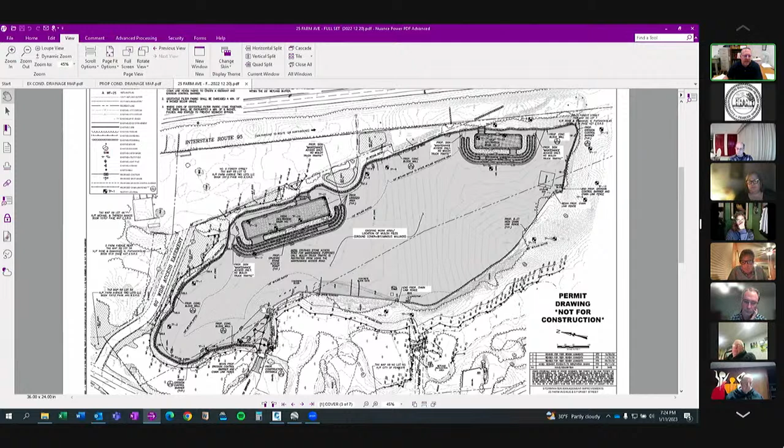What the test pit information also revealed was that in the northern lobe of the property, there was historic fill, and the city and GZA agreed that this area was not an ideal candidate for infiltration. As such, we initially attempted to send stormwater from this area. If you remember in the existing conditions drainage map, we have this large area here, which is about 105,000 square feet. We attempted to send this to infiltration basin 1 and treat the stormwater here.

What became evident during that process was that it was not practical to treat for or attenuate the peak rates of runoff coming to this design point. We were sending too much water to this design point and didn't have a practical solution for that. So we pivoted back to the design you see before you today, which is to retrofit an existing development with BMPs to treat for water quality and provide groundwater recharge.

Through the peer review process, and my thanks to Janet Bernardo for her review comments, in addition to the stormwater BMPs I just described, the project also includes vegetative screening, which I believe is shown in our proposed drainage map, in this area here. It also includes a 6-foot high chain link fence that will be outfitted with geotextile filter fabric. That fence begins here and wraps around the property and ends over here, extending this entire length.

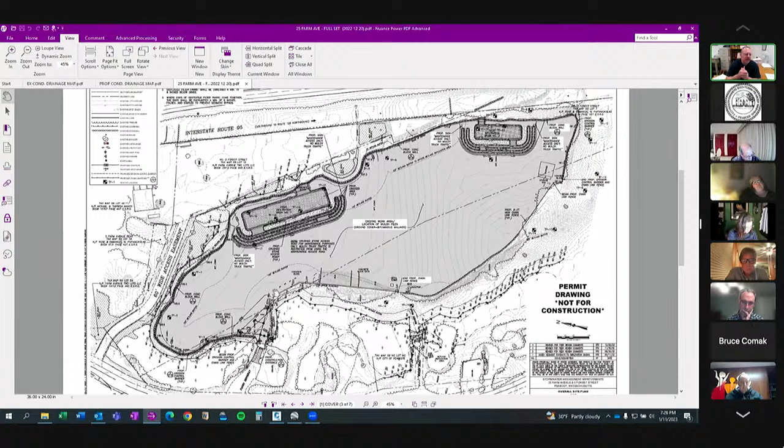Additionally, we understand that the peer reviewers suggested some supplemental spot grade information. The concern is that there's not enough information in this area to adequately describe the intent of the design, which is for upgradient contributing areas to drain to the sediment forebay prior to getting into the infiltration basin. So we will definitely update this area to include additional spot grade information to better define that design intent.

We'll also update our O&M plan to include all the revisions suggested by the peer reviewer.

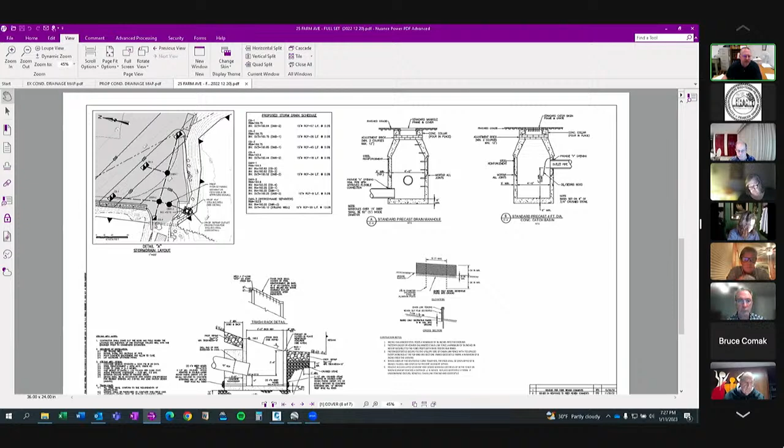As Kim had touched on, we understand that there's some concern with the closed portion of the drainage system. This is a zoomed in look at that. We have a series of catch basins connected to a hydrodynamic separator, which will then go to a stilling well. This is a detail of the stilling well here, for energy dissipation.

JD Raymond is committed to inspecting these catch basins and the hydrodynamic separator weekly instead of monthly, as is currently described in our O&M plan, and they'll immediately schedule cleanings when warranted.

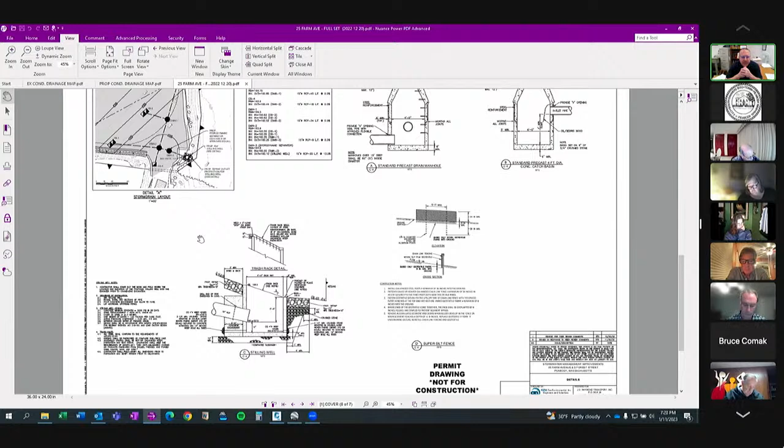At this time, I'll turn it over to Dan Nitschke to discuss more of the planting plan.

Thank you. Dan, you're on mute.

My apologies. Thank you, Steve, and thanks for keeping this design up. The screening, as you see on the map, says 4 to 6 foot arborvitae. We thought about that a little bit more from the perspective of potential wood mulch migrating through the air, and we think we've got a better planting idea.

What we'd like to propose instead of arborvitae is Colorado blue spruce. Colorado blue spruce has a maximum height of 75 feet, ranging from 50 to 75 feet. That puts us in the 60-foot range folks were looking for, if the piles were allowed to be that high, giving something similar in height. Spruce trees grow fairly dense. We plan to place them on a 15-foot on center arrangement. Their identified width is typically in the 10 to 15-foot range.

So if we place them every 15 feet, we expect that the edges of the branches will interlock as they become mature, creating more of a full barrier for the wood mulch to keep that onto the property.

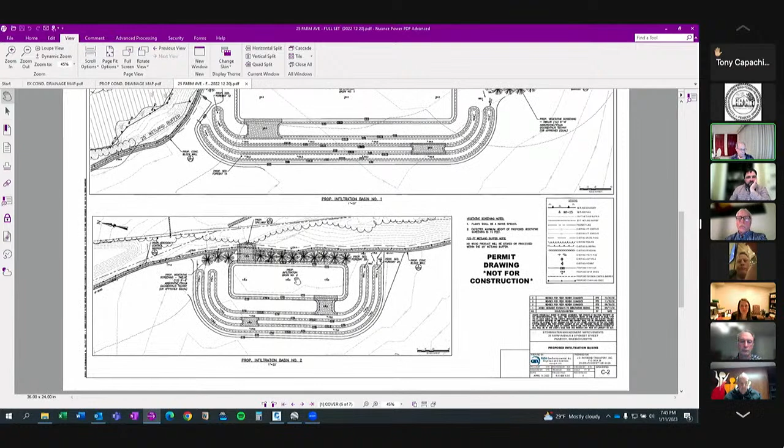Okay, my second question, so in conclusion, my questions would be with regard to the closed drainage system at the driveway. The concern is that if the system gets clogged, the resource area would receive runoff, and there's no way of rectifying that.

So am I correct in saying that the weekly inspection of the drainage system is going to mitigate that problem? In other words, the system is designed size-wise to handle any storm water, it's just that if it got clogged there'd be a problem. Is that correct? Yes, the weekly inspection will greatly increase their ability to maintain the drainage function of that area. But the system is sized to handle it, subject to it not being restricted by flow, restricted by silt or other matter that might get into the catch basins.

That's an engineer question, Steve. So the catch basins are in place to provide some water quality treatment, as is the hydrodynamic separator. In storm events of greater intensity than the water quality storm, which is a 1-inch storm over the contributing impervious area, water is going to continue going where it goes presently, which is just overland into the resource area. So what we're proposing is to treat the water quality event, and the catch basins will contain any floating mulch, as will the hydrodynamic separator.

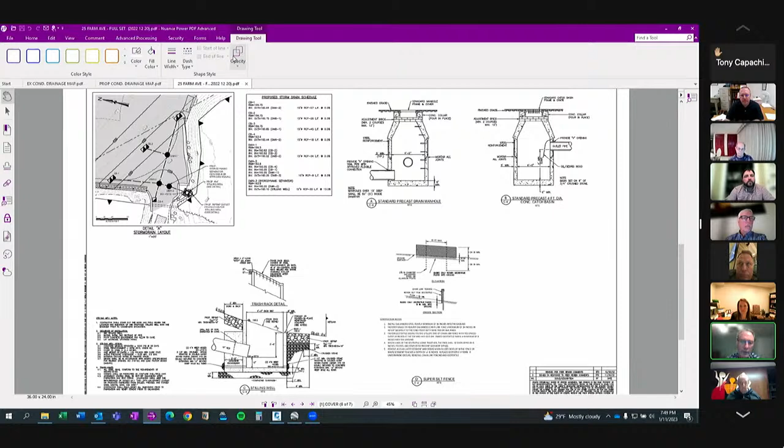And just if the engineer could quickly describe for me, to understand the functionality, it looks like the drainage system is all overland or sheet flow. If you could go back to the other sheet with the proposed conditions drainage. So those are all, it's all the drainage would hit those curved depression areas first, and then fill up, and then fill into the square basin later.

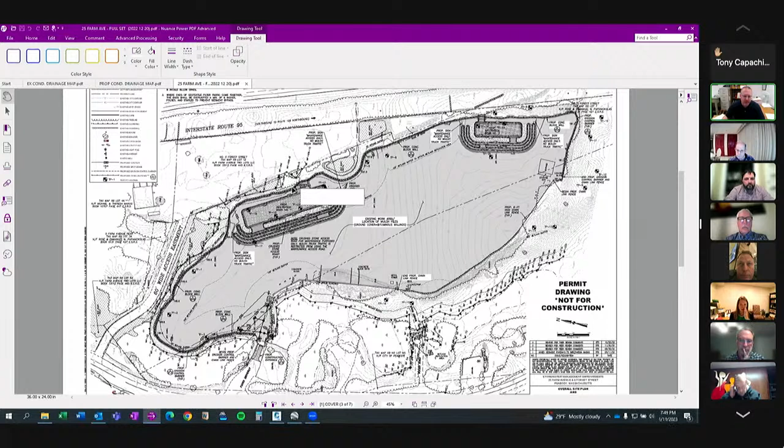Correct, it'll be collected by the first sediment forebay, overspill into the second sediment forebay, and then spill into the infiltration basin. This is sized to hold and infiltrate the water quality storm. And again, in larger storm events of greater intensity, it would just continue overland where it goes presently. So the water currently leaves the site here, and in this corner here.

But these treatment practices are being installed to treat for the water quality before it goes down gradient. So over time, we're attempting to improve the existing condition, and over time those basins will be dredged, per se. The maintenance and inspection of the basins and the sediment forebays include removing any accumulated materials within the basin or the sediment forebays. Yes. Okay, thank you. You're welcome.

Anybody else? Does this have to be open to the public at this point? Mike? Yes, through the chair, Stuart, I have some comments to make, but I'd like to hear from the public first. Okay, let's open it to the public.

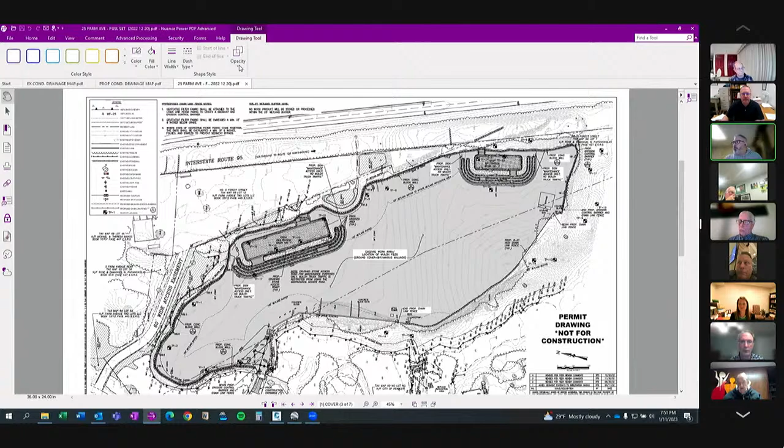But briefly, I have some concerns, and I think they're getting there. There's some new information that came out tonight that is promising, but we're just kind of hearing this information, as is the commission tonight. But I did just want to summarize some of the outstanding issues, and I'll be very brief as I go through.

So before the order of conditions issued, Horsley Witten had concerns with the closed drainage system. DEP had some technical comments that related to seasonal high groundwater and pre-treatment. And then we had issued a letter on December 21st to Bob Langley with some comments on the project as well.

So Horsley Witten said that they have some issues with the closed drainage system. We have some issues as well, in that, first of all, the Stormwater Handbook says that for each deep sump catch basin, only a quarter acre of impervious surface can be tributary to it. They have 3 deep sump catch basins with over 2 acres going to it, so you can't take the full 25% credit. And then the hydrodynamic separator that they're taking 75% credit for.

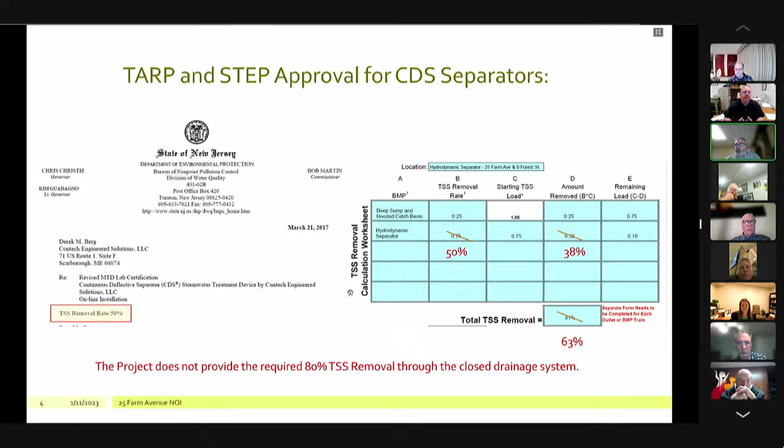If you go to the TARP and STEP approvals for the CDS separator, it's called out at 50%. If you run the 50% through, they're at 63% TSS removal for that treatment train. So again, they don't meet the standard in that area.

Soil testing in the infiltration areas. The logs didn't indicate they were witnessed by the city, but they did address that tonight. We discovered some discrepancies in the soil logs.

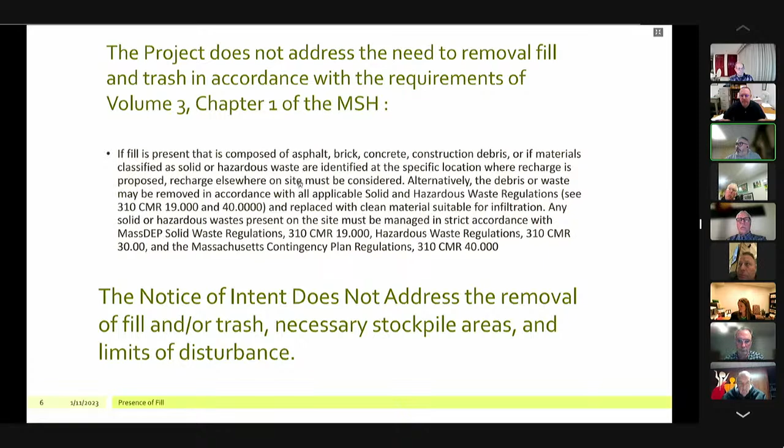Stormwater Handbook covers if you discover trash, the trash should be removed if there's going to be infiltration. They did talk about that node and not infiltrating in that area. However, if any of it's going into the infiltration area, they need to come up with some sort of a plan as to how they're going to remove the soil, where it will be stockpiled. There's no stockpile areas indicated on the site. If you've been out there, you realize there's large piles of mulch. So during the work, there really should be a construction plan, construction settling basins, construction access, and the like.

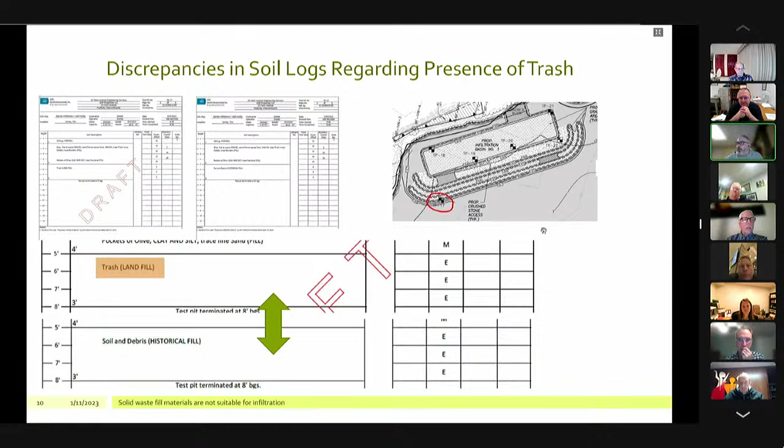They did file a draft soil log in November, and then they indicated that there was trash in landfill in TP17. And then when they filed the final logs, it's just called soil and debris historical fill. So we have some questions about that, but if Will Politz was there, again, I'm sure he's looked into that.

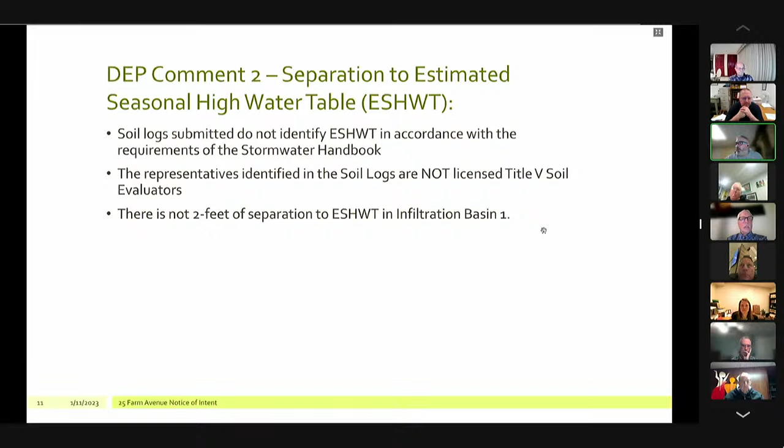The soil logs don't call out seasonal high water table requirement in the manner stated in the Stormwater Handbook. It's supposed to be done with mottling similar to Title V soil testing, and they just indicate groundwater elevations as observed. The standing water in their existing plan shows a water level elevation of 162.1 in that open exposed pond

that was a replicated vernal pool that was filled in. Bottom of their basin is 164. Checking my math, that's still less than 2 feet. So that does not comply.

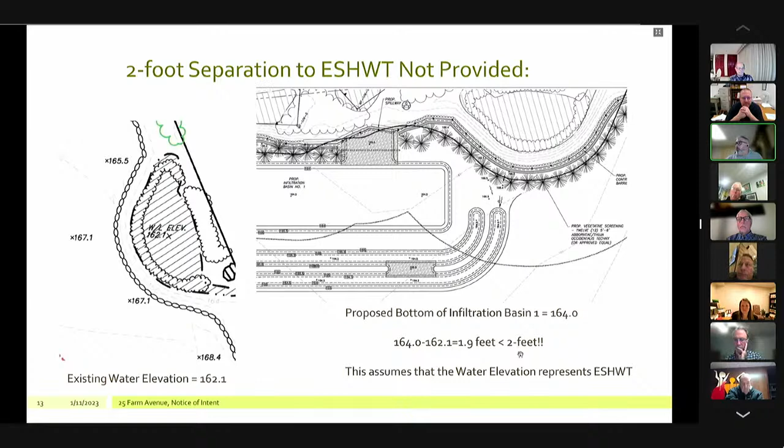And for an example, the water table elevations, when we did our project, we were getting 163.5 and we had virgin soil there. So that's a more representative water table for this area. They're calling out fill in all of theirs. So it's hard to find redoximorphic features in fill.

The infiltration basins require pretreatment. This was a DEP comment as well. They're proposing 2 similar treatment methods in a chain. That does not work. DEP does not accept that.

That would be like me saying I'm going from a deep sump catch basin into a deep sump catch basin into a deep sump catch basin ad nauseum until I hit 80% TSS removal. That's not the way it works.

And they're very specific for land uses with higher potential pollutant loads, specifically log storage and sorting yards, which a portion of this site is. They specify the pretreatment BMPs: oil and grit separator, sand filter, organic sand filter, filtering bioretention, or an equivalent. Sediment forebay is not an equivalent.

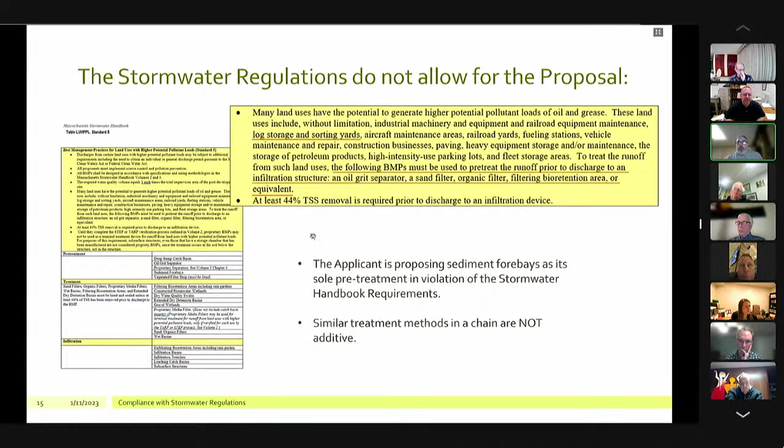So the project does not comply with the stormwater handbook. And then the concerns in our letter were the validity of the wetland delineation, the discharges to the isolated wetlands, and then again, additional compliance with the stormwater handbook for new projects. They classify this as a redevelopment.

I'll get into that a little bit later.

The wetland flags were hung 11 years ago, and to date they have not reestablished the wetland flags in the field. So I don't know how anyone's evaluated the edge of the wetland without seeing flags physically hung in the field. Not only that, it doesn't encompass the whole site. If you remember back in 2018, 2019, the chairman and vice chairman were there, Mr. Comack, we had issues with the Just for Junk site, LaBelle Tree Service, and we were told that any further application would delineate the entire site for the wetland line.

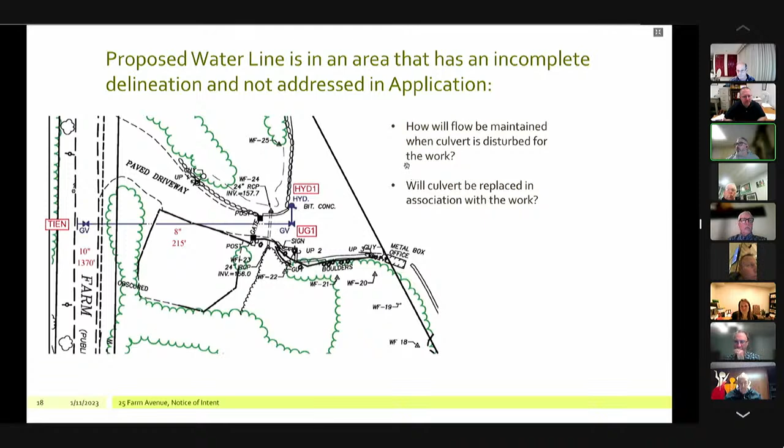And here we are relying on an 11-year-old delineation. The areas where the proposed hydrant are coming through, there's no wetland line shown in this area here or down here. So we don't know what effects, if any, and they don't discuss how the flow is going to be maintained in their notice of intent application. They're crossing under a culvert, I'm assuming, could be over, but it doesn't look like there's going to be enough room. Are they going to pump around? How are they going to maintain flows? And is the culvert going to be replaced, because there have been issues with this culvert before being blocked.

They analyzed the whole site as flowing to the isolated wetland system. We contend that they should be evaluated at each isolated wetland because each pocket could flood and overflow. And given the pile locations, we still don't feel that this is an accurate representation, that this whole area of the site flows towards our project.

And I give you their existing conditions plan. If you start looking at the spot grades, we have 179.7, 176.5, 176.5, 180, 176 - it's all flowing in this direction. There's a low point here, 172.7. They don't account for any water that's going towards the BVW in this direction.

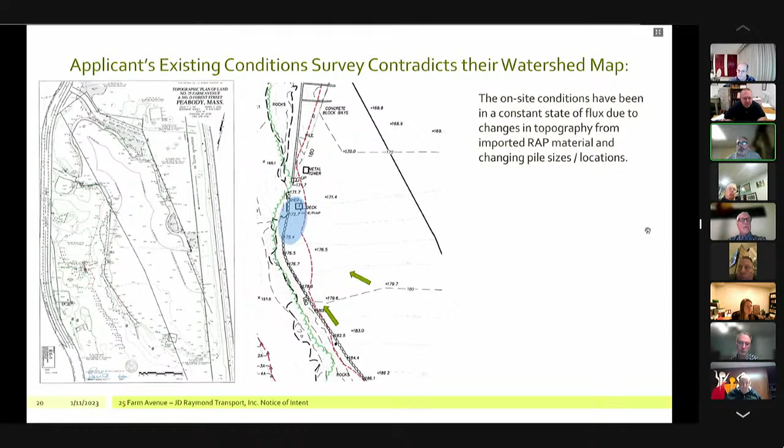And the conditions have changed continuously based on the RAP that's been put out there, the reclaimed asphalt product, as well as the changing pile locations and size, not to mention their proposed plan doesn't show the piles, how the water will split and how they'll maintain grading around those piles to get the water to flow to their infiltration basin. The isolated vegetated wetlands that are receiving the water, as has been discussed, are full of debris.

This was from the Horsley-Witten review showing pictures of the layer of mulch that they're calling minor. If you go out there, it's over a foot deep. And in a minor rainstorm, it floods almost to our stormwater area. So redirecting the entire site to this area is going to cause some issues.

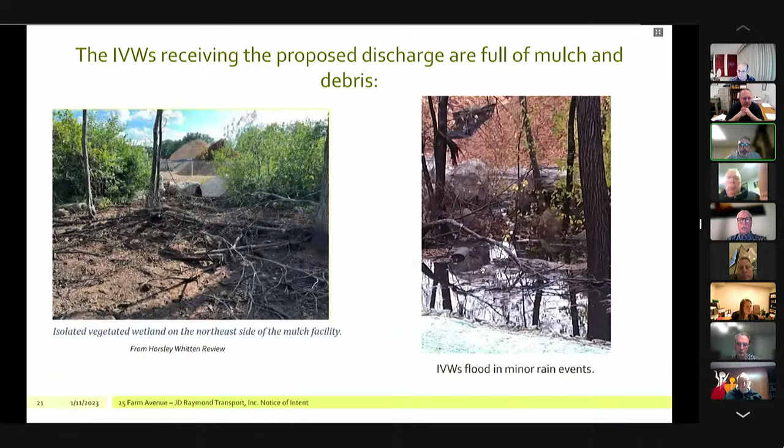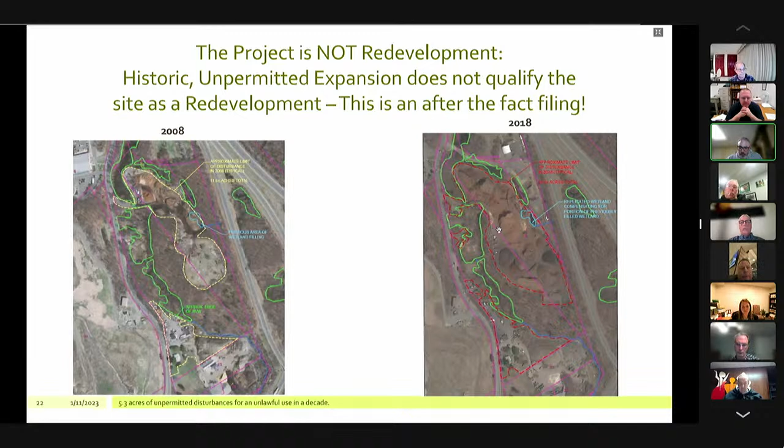The design of the infiltration basin doesn't comply with Volume 2, Chapter 2. I've highlighted some passages. The storm associated with the brim full condition should not include the 1 foot of freeboard required to account for design uncertainty. So from where their discharge is, there should be a foot of extra storage in that basin to the top of the berm.

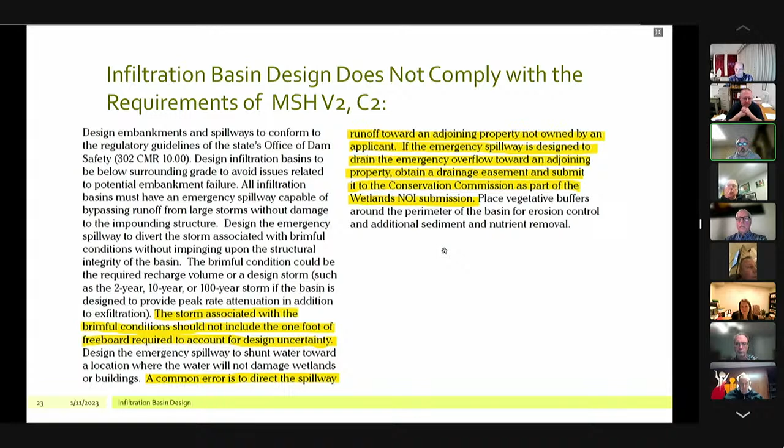And then they even direct the emergency spillway runoff towards an adjoining property not owned by the applicant. If the emergency spillway is designed to drain the emergency overflow toward an adjoining property, they need to obtain a drainage easement and submit it to the Conservation Commission as part of the wetlands notice of intent. They're discharging directly to the isolated vegetated wetlands on our properties with no outlets. So this is an issue - their basin doesn't provide any freeboard in any storm.

Infiltration basin 1, top of berm is called at 166. In the 2-year storm, it's within 2 inches, 0.16 feet to the top of this berm along the whole length. The 10-year storm is within 1.5 inches. In the 100-year storm, their calculations show they're flowing a tenth over the entire berm. That could result in catastrophic failure. Once you start getting channelization through this berm, you'll take the whole berm out as soon as you start to channelize the flow. It's a safety issue.

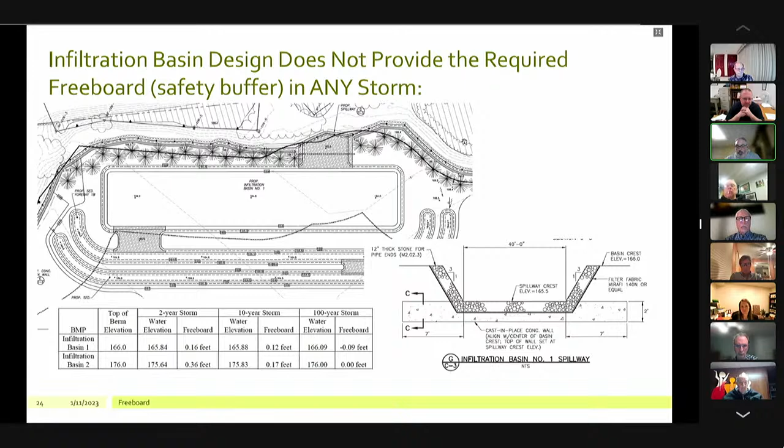Not to mention all the material that'll go into the wetlands.

So again, we're asking the commission to require them to establish the wetlands line in the field to be reviewed, comply as a new commercial development, do not grant them relief as a redevelopment, make sure they meet TSS removal, pre-treatment, and separation of seasonal high groundwater, analyze the effects on all the IVWs, as well as the potential effects to BVWs by rerouting base flow that's going to those BVWs away from them. So they're taking flow that normally goes to the wetlands away from them.

Provide an adequate safety buffer in the infiltration basins. That means provide some freeboard. If it overtops, it could lead to catastrophic failure with damage to our property, injury to someone downstream, or if someone's caught in the mud, they could drown and die.

It's a serious issue, as well as include all the proposed and necessitated work in the narrative and application, including any removal of landfill materials, the installation of the water line. And again, they're talking about a second hydrant that we don't know where it could be. They could be trenching entirely across the site through buffer zones, locating another hydrant. So again, I think the commission needs to get a full application before they can act. And I apologize for taking up so much time, but thank you very much.

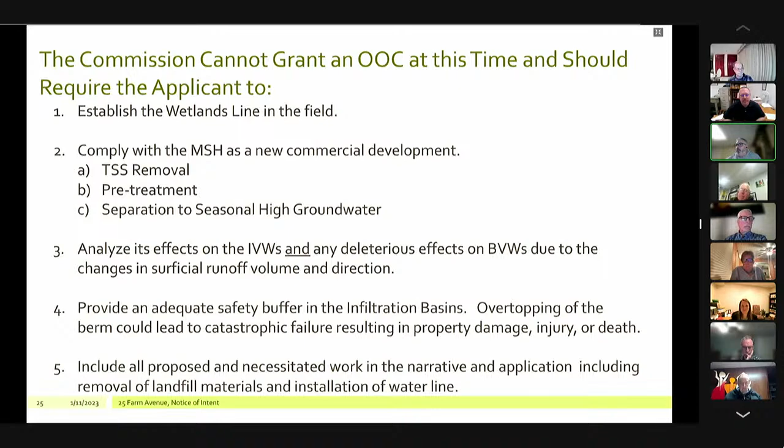Thank you, Tony. That was enlightening.

Can you send all that information to Brendan and to Lucia? Raises a lot of questions. They did, I just need to have it. They've written down all these things and looking to send it to Brendan and Lucia to get these issues resolved.

Mr. Chair, if I may. I don't know, may you? Thank you.

Just to answer your question, Tony, I'm sure we'll reiterate and send that documentation you've requested to both conservation agents. But he has been fastidious about answering the peer review as we've been able to review it. So you have a substantial record of letters from Hayes Engineering in your file addressing a lot of these issues. Of course, some new issues have arisen as the information has been supplemented.

One thing I want to point out, and this is pretty upsetting, it's the second time I've seen this. The applicant here is using the November 2022 return to compliance letter from the DEP, which relates specifically to the ACOP, which was issued. You may recall, Chairman, Vice Chairman Rizzo and Commissioner Comack, that there was an ACOP related to a violation, a JD Raymond applicant violation for illegal fill.

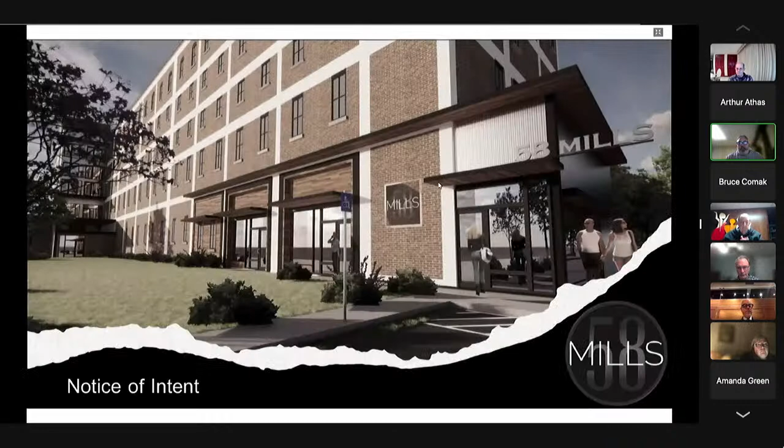It's probably going to be your only coastal bank filing in town here. We're going to create 45 units of housing, 100 dedicated spaces, and a comprehensive parking plan throughout the site, which you saw portions of for the notice of intent.

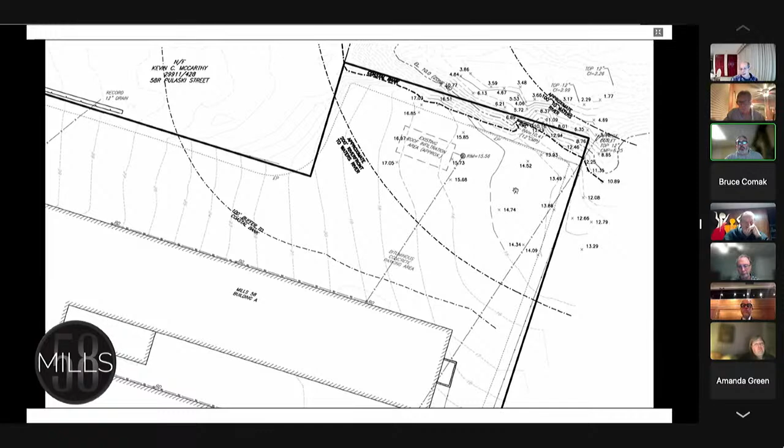We have 2 buffer zones on our site, or 2 resource areas. The riverfront area, which is this darker line here — the bulk of this area is already a paved parking lot. And then the 100-foot buffer to a coastal bank. The coastal bank line is this line here running at the top of the bank, encompassing a bit more of the parking. Like I said, the majority of the jurisdictional area is paved. This is a close-up of that area, showing the edge of pavement running around here, the 200-foot riverfront, and then the 100-foot offset to the Waters River. It's a tidal river.

So the proposed work is reconfiguring this parking lot. The bulk of the work is adding some landscaping islands. We do pave a small portion in this area here that's kind of gravel full of invasives, and adding some stormwater infiltration under the parking lot. This is a true redevelopment project. It was asked that we add this basin — we did, and we asked to defer the soil evaluation until after the fact.

We're adding some landscaping, some plants of some benefit. We have some red pines, white firs, some red maples, as well as I think some red osier dogwood as well, proposed throughout the site. Just some other benefits.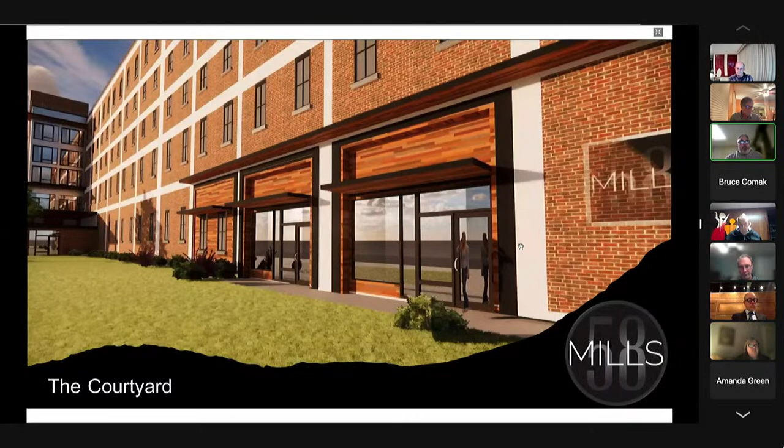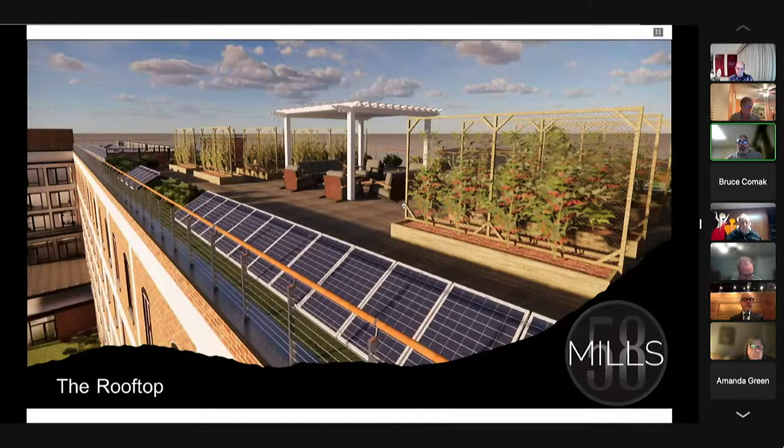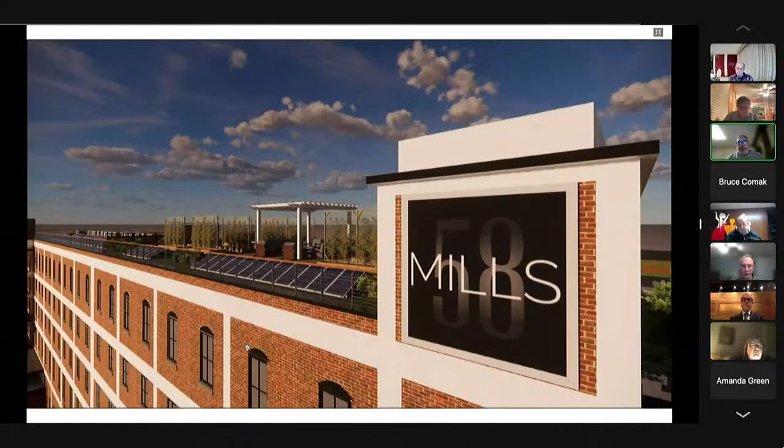The interior of the buildings is existing paved area that's going to be brought to a grass landscape area. I know this is outside the buffer zone, but these are some benefits, as well as other environmental concerns. We're adding solar to the roof with some roof gardens — I know Lucia's a big fan of green roofs, so this is kind of a compromise situation. Some sitting areas on the roof with gardens, and outside the sitting area, the rest of the roof will be dedicated to solar power generation. So overall, we're seeking it to be an environmentally friendly project.

I'll put the site plan back up, and if the commission has any questions, I'd be more than happy to answer.

Can you go back to the pictures of the slide of A, B, C, and D? Yes. And which one is this? We're building A, so we're the parking lot that's adjacent to building A.

Got it. And the river is back there above A, that's the Waters River, right? That's the Waters River, and it is tidal in this area. It's tidal, yeah.

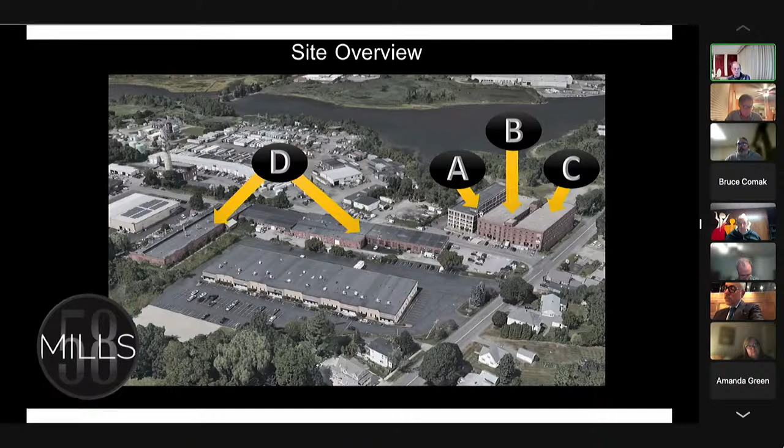So I have a small question. We've had visits on this overall site a number of years ago when there was busing issues with buses being parked down by there. But we always recognized that this was the city's only location where we're in contact with the Waters River and our connection to the coast. I'm wondering if there's any enhancement with this project that would provide some enhancement or access relative to beautifying that area.

So on our property, where we're seeking to remove the invasives, and I apologize for the late submission, but we got an invasive removal plan over to Lucia today. We're happy with any condition that satisfies Lucia on the invasives, but it's a pretty basic plan - cut, paint the branches with glyphosate and hope they die off, and stay on top of it.

As far as an enhancement, what we did was we looked at this corner here and we're proposing to level this area out. We do have a little bit of a spreader that comes in because this is where all the parking lot runoff goes, but we'll put riprap and a curb around it to catch any trash. The thought was to put some picnic tables for the residents here, so they would be as close to the river as you can get on this site. So we are looking to enhance as well as add some screening and some native type vegetation in the buffer around the parking lot.

The property owner, Ed Greeley, does not own the land behind this to the river? That is correct. If I could answer that - go ahead.

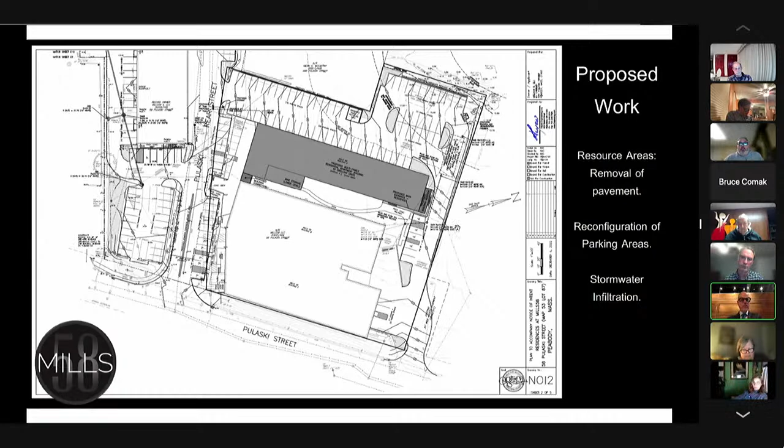And the other thing I would point out is that in addition to the green enhancements that Tony depicted in landscaping, we're going to be creating a whole new group of residents who are going to be coming in and enjoying, both from the rooftop and many of their apartments, views of the ocean from Peabody that no resident in Peabody has really ever enjoyed. So that I would consider a nice enhancement.

This is really an exciting project, and I'm really proud to have been a part of it for all of the reasons that you're seeing, but also as a redevelopment mill project. DHCD, the Department of Housing and Community Development, when we proposed this, was really excited about it - it's something they don't often see. And I'm happy that the Conservation Commission is a part of it, adding another layer of input as we complete the approvals here.

One thing I didn't want to lose - the forest for the trees - the reason we're disturbing is because we're actually taking up impervious surface and adding green space, and we're doing it within that coastal area. So to the extent that's considered a disturbance, here we are - we're making a green disturbance, if you will.

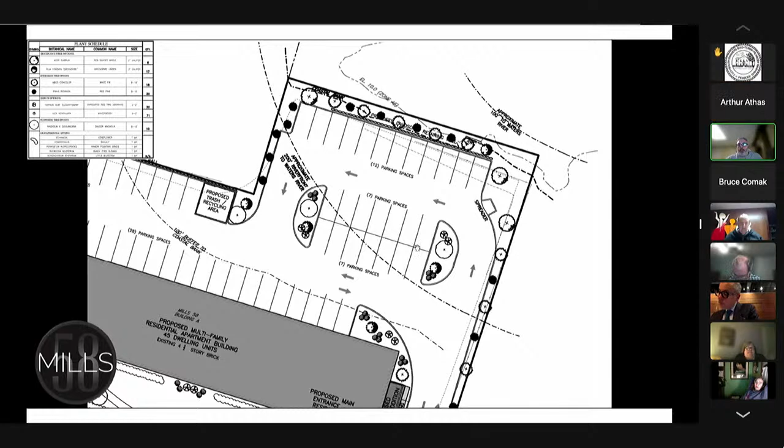So when we went through the stormwater, what we had was both for buildings B and C. Let me go back to here, here's a good example.

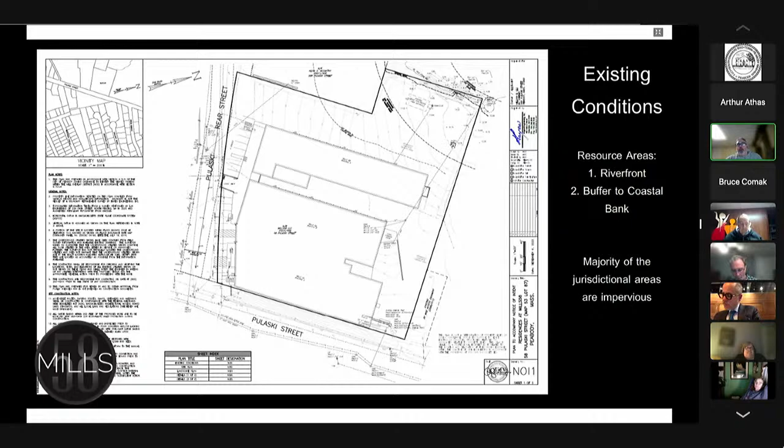Building B and C, their entire roof was unmitigated, draining directly out to the river. So we're adding the stormwater improvement that Leslie Witten recommended and we agreed to, adding this subsurface infiltration area that handles an inch of runoff off the roof.

My only question was if the green area was a rain garden or just green area, and you just answered it, green area. I like the fact that there's green in the corner with potentially a sitting area and stuff. It's a nice project.

Anybody else? Anybody on the commission have any comments?

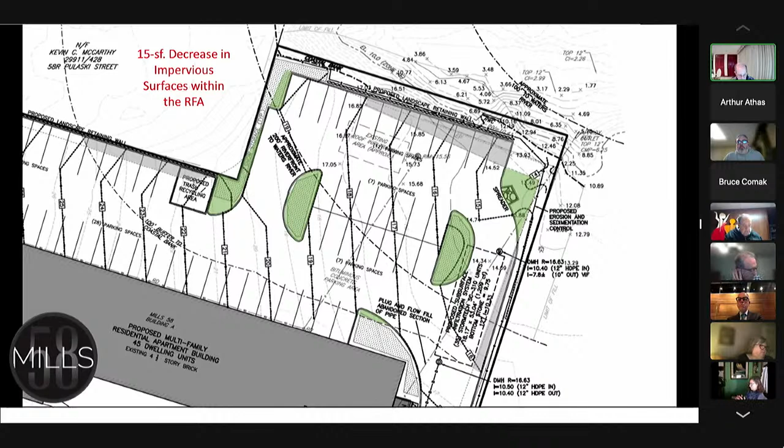Just a couple comments. There was some from DPS, depending on how we end up this evening. For the infiltration system, we need to make sure that DPS is on site to inspect the bottom of the infiltration system prior to putting any other materials on there, and that an as-built would be provided at the end.

There were some comments by staff. I think you indicated, maybe you didn't, but test pits have been done in locations of proposed infiltration. So the test pits have not been done.

We did provide Lucia with the Horsley Witten review that agreed with holding off until construction. And then Bob Langley also agreed, and I believe he submitted a letter to that effect.

So is there any chance that in waiting for doing the test pits during construction, you could encounter something that could actually require or be an issue where the project would have to change in any way?

No, so what we had arranged with Horsley Witten is if we can't infiltrate, we'll line it and just use it as detention to slow the water down.

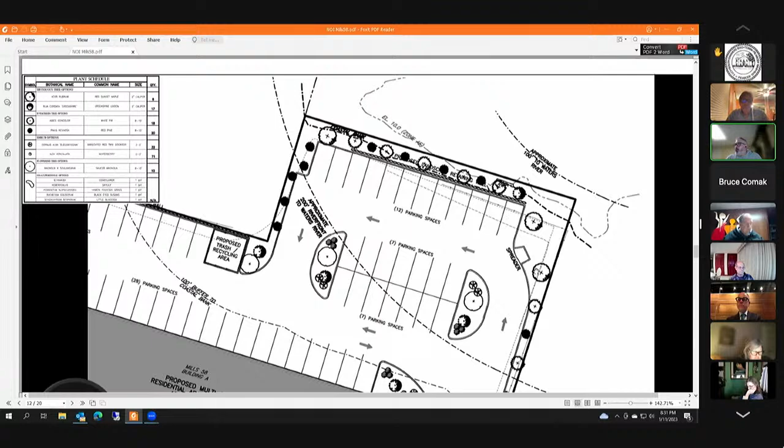The other thing we talked about was looking at if we find an area that's unsuitable. This should all be outwash from the river, it shows as decent soils. The other option was reconfiguring the location to someplace where it would work.

And then looking at a shorter infiltrator. These are the 310s, which are the 30-inch, 4-foot profile. They go down to a 12-inch profile, so we could modify and just submit it as a field change.

Okay. And I will say, sorry, we are planning on doing the test pit sooner rather than later. I've been in talks with the owner now that we have the approvals, looking at getting them done over the winter.

Is an LSP required on this project? No, we've got a clean phase 1 and phase 2. The only contamination was inside of building B or C, so that was reviewed by Horsley Witten's LSP as well as part of the board review process.

Another comment was we need a narrative regarding invasive species removal, if it's got to be done, and how you would target each species, etc. So we submitted that today. I know it's a late submission.

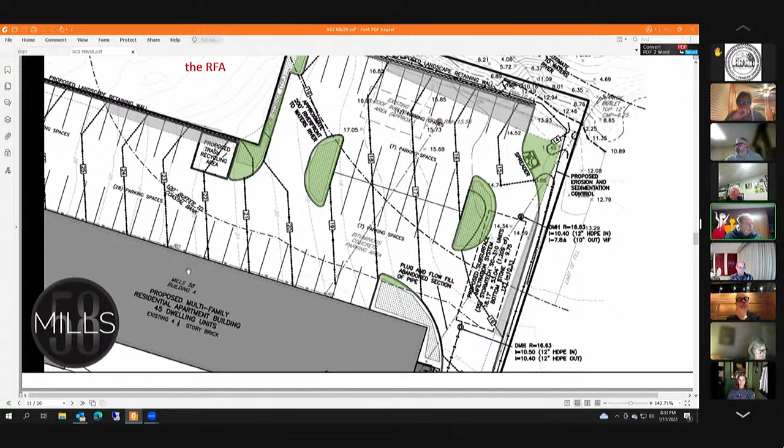And then the last question was, is this proposed addition outside Concom's jurisdiction? It is, and I did respond to Lucia on that as well. As I said before, this is the limit of the 100-foot to the coastal bank, that's the furthest zone, and we have a small addition right here, which is outside the 100-foot.

And then they're actually going to connect, there's a deck area here, they're going to connect the two buildings, so the people from building A can pass through to building B and C and use the commercial uses without going outside. How nice.

Okay, I'd like to, does anybody from the public want to speak? Can I speak through the chair, please? Go ahead, you had your hand raised.

Yep, all right, these are just very nitpicky things. I can't hear you. You can't hear me? We can hear you. Okay.

I agree, this is a really exciting project. I think the city is very lucky that Ed Greeley is doing all the work he's doing on the Bell End, this property, it's just amazing. I think Tony's doing a great job.

So some nitpicky things I have: I was able to read the invasive removal plan before the meeting, but my question is, I don't know if this is in the NOI, because I reviewed the NOI like 2 weeks ago and didn't look at it again today. You don't really mention in the plan or the narrative how you're finally stabilizing the area. I'm assuming it's going to be a wetland seed mix.

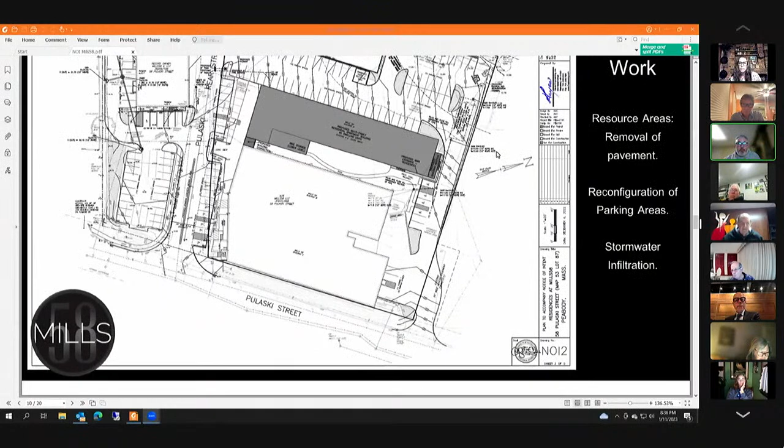So a lot of the invasives are going to come out because they're basically at the top of the slope here, as well as in this area here. So some of the work here, the pavement will be our invasive species management. But we have some that runs all the way down the fence in this area that we want to clean up, basically to the top of the coastal bank here.

There are some bittersweet vines that we want to go in and just cut because the base of them is off our site, but to keep them off the slope, hopefully by establishing some of that erosion control mix, roadside matrix mix, that'll start choking some of it out. But it's something we're going to have to stay on top of.

The knotweed is kind of up in the flat area here. It's gravel, a lot of trash and debris that needs to come out.

So you are doing work in the coastal bank, and how are you going to do this work? Is there a plan? This is the only plan that you have? Because I'm just wondering, when contractors or these people come on site, it said specialists have to do this work. How are they going to know where they're doing this, and how am I, as the agent, when this is over, going to know that you did this the way you were supposed to?

So we could add to the plan. The thought would be that this is all supposed to be cut by hand, and then the exposed limbs, exposed roots, exposed stems painted with the herbicide. Yeah, so it has to be a licensed applicator.

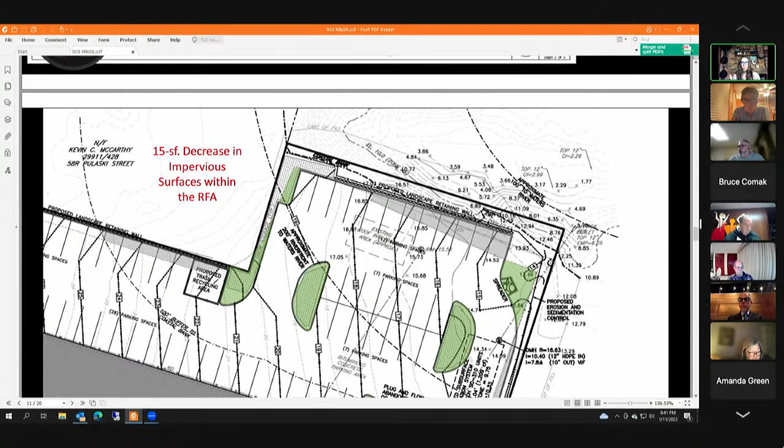Yep, I just have two more nitpicky things. I've seen on newer plans, engineers are starting to use tree islands where they cut a little of the curb out so stormwater can flow into the tree and feed it water, so during a drought they're still getting some water when it rains, not just from above. That's just a thought, throwing it out there, you don't have to do it.

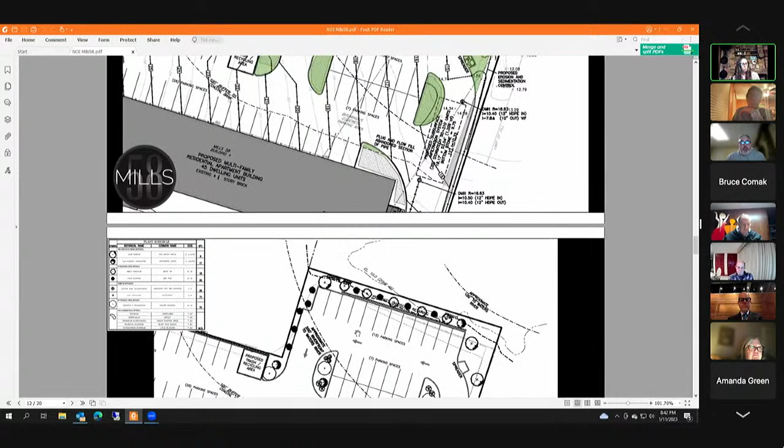And then I noticed where those trees are going to be, you guys are going to be storing snow. Are those small areas the only places for snow storage, and what are you going to do when those areas are exhausted? Is there a snow storage plan?

Yeah, so outside of this area, once we exhaust the smaller areas in large storms, we're pulling this area back here that used to be paved and making it pervious. This is on the Building D site, and this is going to be our larger snow stockpile site for all of Building A, B, and C. So we have a place to stockpile snow in large quantities, and then it'll go through into the drainage system we've designed, which includes a hydrodynamic separator and a rain garden at the end as part of the Building D modification.

We're presenting this small corner, but we've engineered the site as a whole, because Mr. Greeley controls the Building D parcel as well as the ABC parcel, and the road all the way back to Peabody Municipal Light as part of the overall parcel. So we have improvements with green space going up the road as well, including snow storage areas.

I'd like to ask a question if I may - Mr. Capuchetti, Mr. Panos, this is more of a city council question, but the parking areas in the buffer zone and the 200-foot area of work, the 2.2 parking ratio you quote - I don't know the Peabody city requirements well - is that regarding potential reduction of parking, if possible, to meet greater pervious areas in this area? I don't know if this is required by city council or planning board, but is it possible to reduce any further?

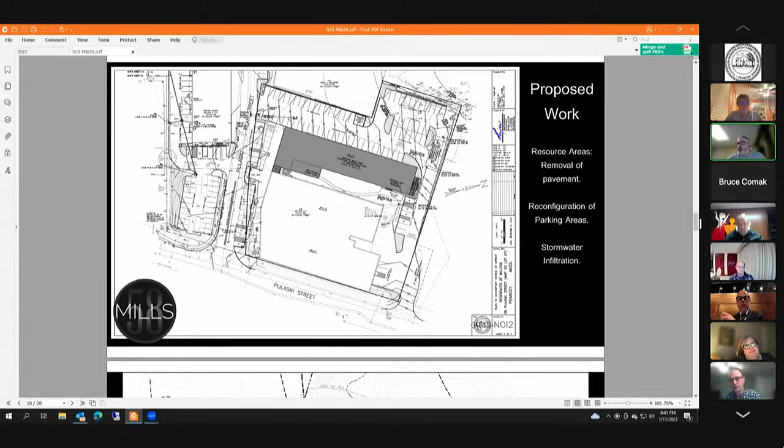I'll answer that, Tony - through the chair, of course. This whole redevelopment proposal is under a comprehensive permit, Chapter 40B statute. That allowed us to seek waivers from the Zoning Board of Appeals, which was the sole permit granting authority, except for Wetlands Protection Act issues. We're already, although not by much, a bit shy of the parking requirements to support the residences - either a bit shy or compliant. The decision through the Zoning Board of Appeals determined our parking plan for the residences, and to seek a further reduction we'd have to go back to them, and we really don't want to do that, since we went through an 8-month process.

So I hope that answers the question, but there was a lot of careful decision-making and back and forth. Our parking plan was peer-reviewed for the Zoning Board of Appeals through Bob Langley. We really needed to make sure this was going to work not only for the site itself and the commercial component, which is ongoing, but for the adjacent neighbors.

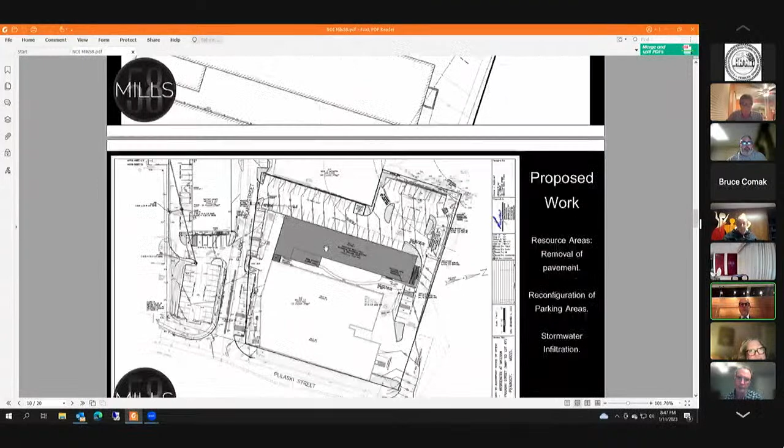May I ask what the unit mix is? Is it 2 bedroom, 3 bedroom, one bedroom? You know what, I'll tell you in a second. I was just looking at the decision for purposes of snow removal and storage, and I'll address that more specifically in a minute. So we have 20 one-bedroom units, 20 two-bedroom units, and 5 three-bedroom units, for a total of 45 units and 75 bedrooms.

I am going to reach out to Commissioner Vivaldi before I go for these other projects, because that's always a big bone of contention. We always look to reduce parking, and the feedback we get from the ZBA is always, are you sure you have enough parking? Because that seems to be a major concern.

But as I said, we do have a net decrease in the riverfront area of impervious surfaces, and we took the opportunity, instead of fully utilizing every space for parking, to look to add some green space closest to the river. We thought that was the most responsible approach.

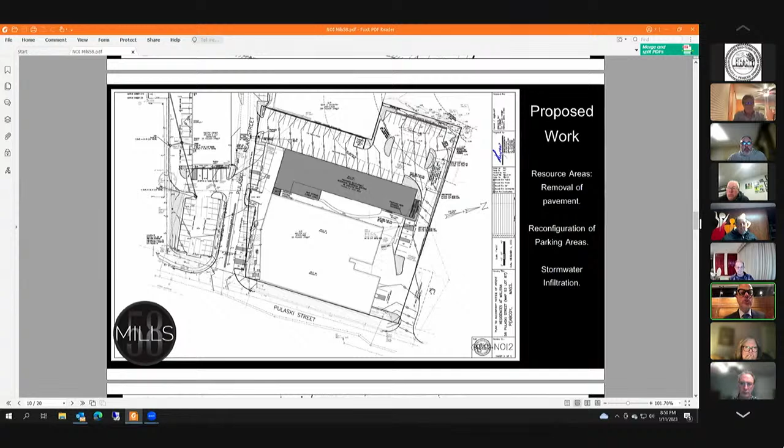I want to go back a little bit, if I may, without taking up too much time, to address the issue of snow storage. The comprehensive permit decision requires that we do not plow snow to the extent that it would take up a parking space. We have to keep all of our snow storage off parking spaces. We can't reduce our parking through snow storage.

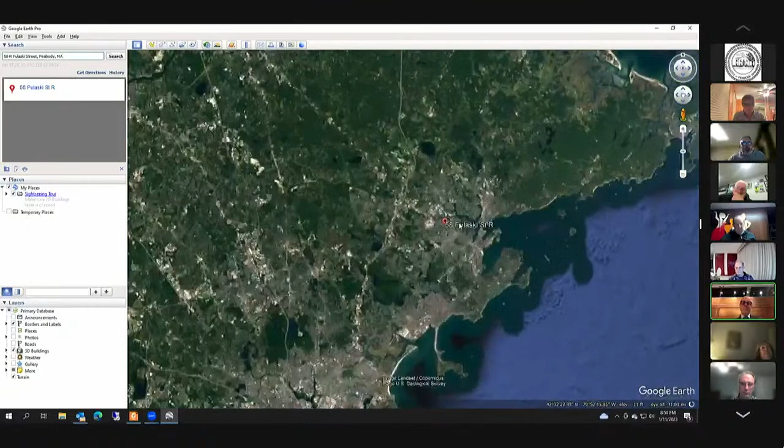There's plenty of room on the extended site, that being the ABC campus combined with the D campus, where we can find snow storage solutions without impacting parking. But that is a mandate from our decision, that we cannot plow snow into parking spaces. I thought that was important to clarify, given the past comment.

So just wanted to give you a better view of the existing conditions up on the screen here. Thank you, that helps.

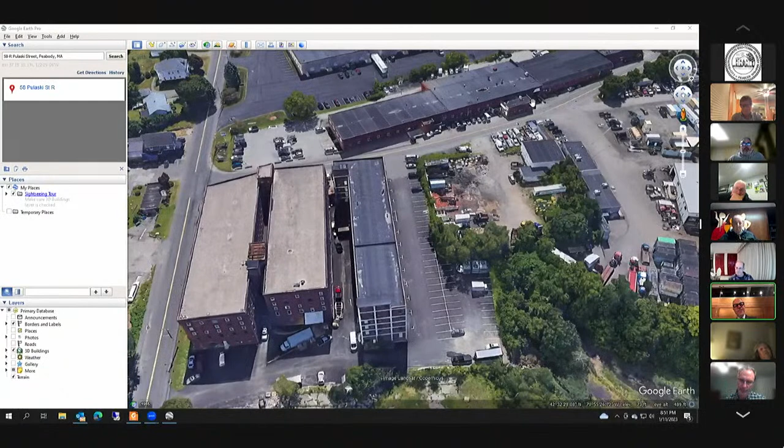One nice feature too that we didn't talk about too much is that alley almost between buildings A and B. Can you see Tony's finger? There you go. That alley is going to be greener. We're proposing a courtyard, some landscaping, a path, and bike storage will be inside in this area. This is where the elevator shaft will be as well.

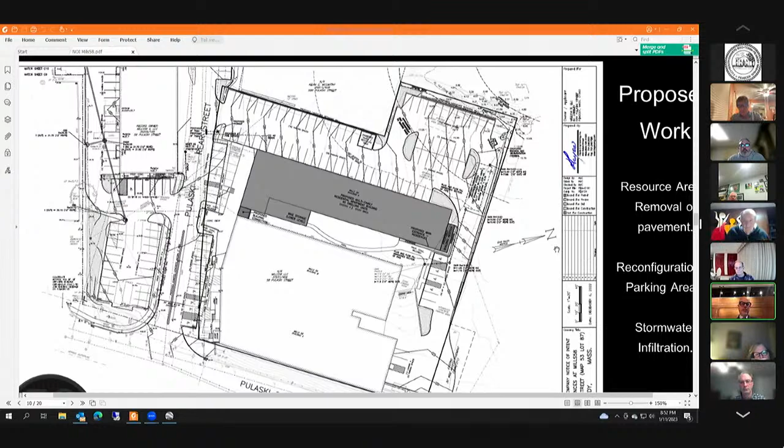And then the daycare, again not really a conservation issue, but I know you're all members and residents of the city of Peabody, so the daycare that's here is going to move into the lower level. So this will also be a play yard for the daycare students, and that lower level on that side of the building actually opens up into that courtyard. The topography is such that on the other side it's almost a basement level, but on the courtyard side it's going to be a green area that'll act as an outdoor recreational area for the kids, with storefront windows.

I believe there's a gym and daycare downstairs that'll come out into that green space. That's correct, and you can see the atrium and connectors use lots of glass so the sun comes right through the new addition to the building, to the extent we can. We really hyper-utilize the space we have.

It's a great project, one of the ones I'm proudest of. I don't know how many 40Bs this is, about the 4th or 5th one in the city I've worked on. And this is a good one. Yeah, this is one of my favorite ones.

If you can convince Ed to give you a tour, the upper level, the views you get up there are great. Actually, we can arrange a tour for you guys if you want. As long as you can close your hearing tonight, if you feel comfortable doing that. No quid pro quo. There's a condition, huh? There's no condition, it's unconditional. Whether you close it or not, you're invited to come to the property if you haven't already, there are lots of amenities already there. I have not, but I appreciate the offer.

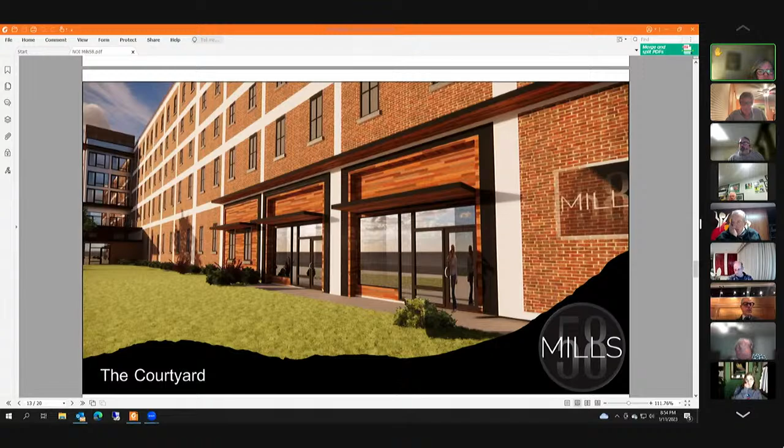Anybody else? Go ahead, Rita. I'm just curious about the water bank, the one where you're going to be taking out the invasive species and everything. Is that going to be open? Are people going to be able to walk down to the water bank from there? I'm just curious about that.

I'm gonna go with no. It's pretty treacherous, especially once you get off property. There's some trash out there, a lot of vines, thorns, brambles. My surveyors were upset when I sent them down to get the shots on the edge of the bank there. I don't see the average person wanting to walk down there. The idea is to keep this area kind of a level area for people to use and enjoy the view.

But I'm just curious, will there be any kind of barrier that would keep people from wandering down in there? So we have a retaining wall, varying from 18 inches to 2 feet tall, that we put right at the edge of the parking lot. I guess they could walk behind it, but if you have the opportunity to go out there, this slope is pretty brutal. The lower you get, it's a lot of debris.

So I don't see too many people trying to traverse this, but we do want to clean it up by getting the bittersweet and the knotweed out of the way and keep it down. It's the best thing for that slope, to get some vegetation on it that's more native.

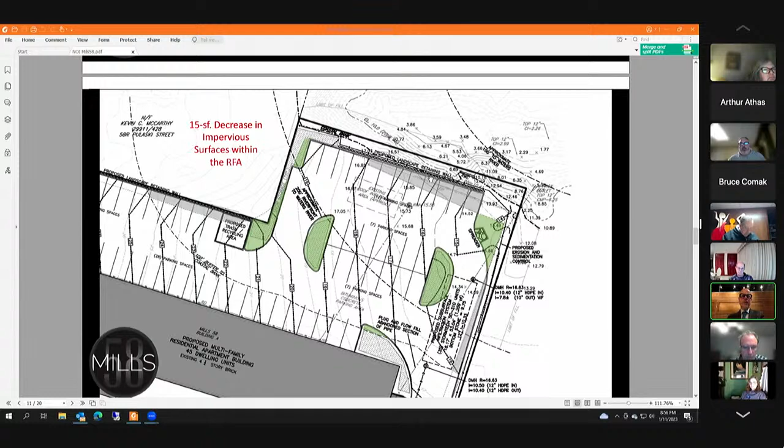The other thing I'd add, Commissioner Cavicchio, is that parking area is exclusive use to the residents. None of the commercial tenants will have access to it or need to have access to it. That's specifically for the residences. The commercial tenants Tony spoke of, the gym and daycare center, will all enter and exit from either the interior of the building, the opposite side at 58R, or through that courtyard area, but they'll have no reason to access that back parking lot.

So the play area you're talking about is between buildings A, B, and C? It's between A and B. Oh, B right, and here. A and B, yeah, so it goes A, B, C. It only took me about 6 months to realize the letters went backwards, I kept wanting to call this one A as well.

So the play area, I'm just worried about kids wandering off if it's really treacherous nearby, that sort of thing, but it sounds like it's not even near there. No, this is the area for the daycare. Okay, that's really exciting. I'd love to go and look at it. Thank you for presenting it, that's all I have to say.

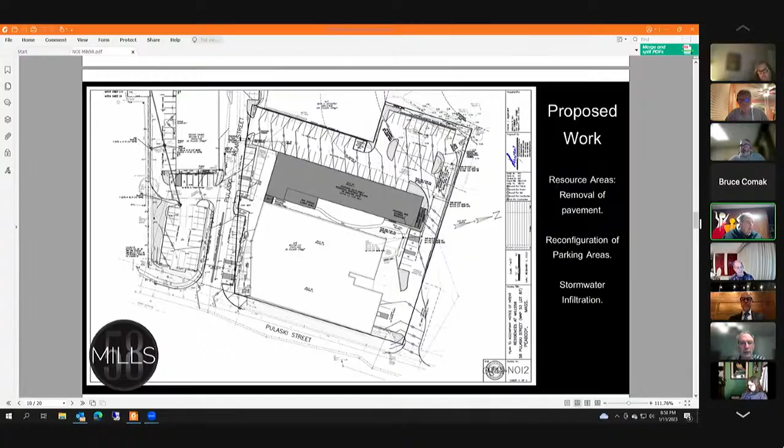Anybody else? So, are we ready to make a motion? Go ahead. Make it open to the public. Have we asked if there's anyone in the audience that wishes to speak? I did, I thought I did, but I don't see anybody.

I don't see anybody raising their hands, so I'd like to make a motion to continue to the next meeting to allow Lucia to receive and review the documentation. Is there a second? A second. Lucia, roll call please. Through the chair, what documentation am I waiting for?

The information that you received today, I thought you wanted to review it a little bit more. Yeah, I mean, I would feel okay. I don't normally want to close stuff, but I feel that if Tony could revise the invasive plan to talk about how he's going to stabilize the area with the seed mix.

I don't know if you guys were interested in having any depressions on the curbs along those trees. They already talked about the snow storage, so I wasn't worried about that.

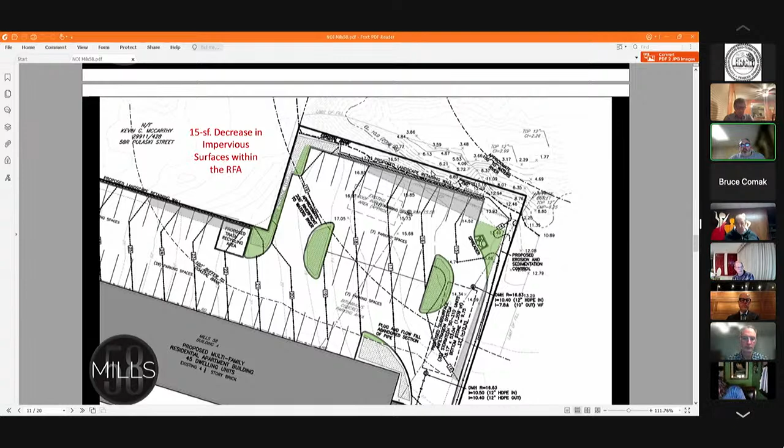The only other thing I see, I think we've already covered this, is under checklist D, under rivers - North River, Goldthwait Brook, Proctor Brook - recommendations for removal of debris. In that lower area, would it be a big effort to clean up any debris that's down there, short of a car or something? Yep, that's the plan.

The bulk of the debris is right at the top, where we are paving. There's a fence right here, a lot of debris is up against the fence, so the bulk will be there. When we're cleaning up the slope, anything we come across for trash we'll remove by hand. Okay, so we'll check off checklist D under recommendations for debris removal.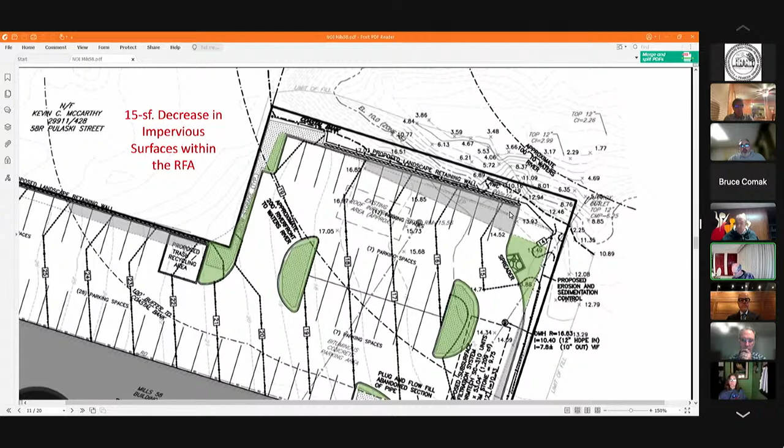Did you say checklist D debris removal, which specifies the North River and the Goldthwait Brook? I know this is Waters River, but I think in the spirit of being along a river, this would provide the opportunity to pick up some of the debris out there, and you would have permission to do that.

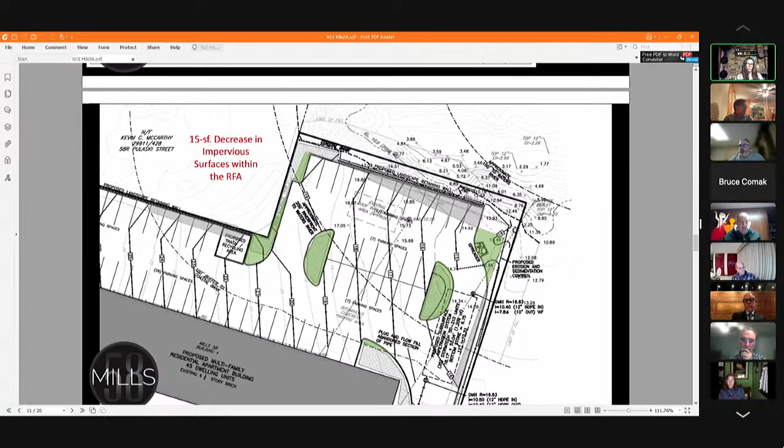Any more conditions? That motion is on the floor by Vice Chairman Rizzo. Do I hear a second? I'll second - wait, I made the motion, is that right? That's good. Anybody want to second this? Second. Thank you, Bruce. The motion was made by Rizzo, seconded by Comak.

Roll call: Commissioner Lazares, yes. Commissioner Rizzo, yes. Commissioner Vivaldi, yes. Commissioner Green, yes. Commissioner Cavicchio, yes. Commissioner Athos, yes. Commissioner Comak, yes. That passes unanimously 7-0, contingent upon those items.

I hope to get them to you no later than next Wednesday, ideally by Monday morning. Monday's a holiday. I get stuck working, but she'll see him Tuesday morning. Thank you all for your time, nice presentation, thank you, and nice project. Thank you. Good night, Commissioner.

Moving into enforcement orders. Can I take them out of order? This item 6 should be 2 seconds.